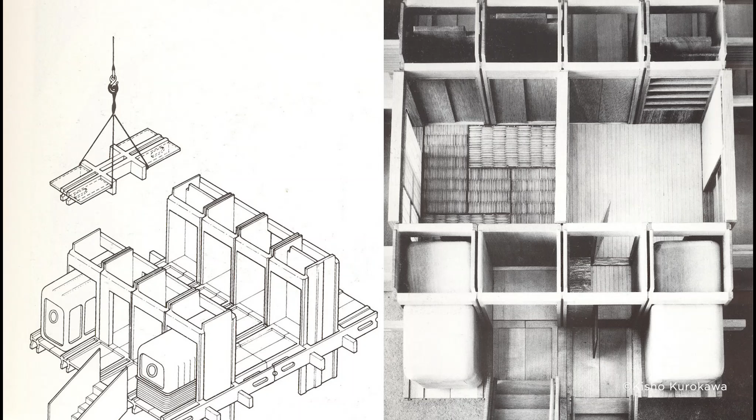That is why the master unit is placed in the center to act as a joint for the servant units that can be attached and detached from the exterior. This allows for periodic renewal of the servant units and lengthening the lifespan of the entire building. This is how Kurokawa and the Metabolists drew a direct analogy between architecture and the metabolic cycle.

However, this project was never realized, and I think part of the reason why was because it was difficult to understand. Designers need to realize that humans in general fear change and the unknown. There's something called the law of inertia that is inherent within us that stops us from taking that leap of faith.

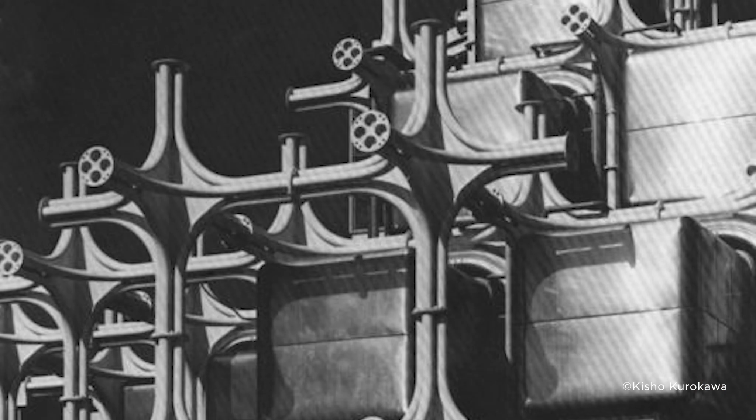In 1970, Japan held the World Exposition Fair in Osaka. It was the perfect opportunity for the Metabolists to showcase their ideologies to an international crowd. Kurokawa designed a pavilion called the Takara Beautillion. It's designed for a cosmetics company exhibiting their beauty products. The structural framework is made up of a single prefabricated framing unit, which is repeated 200 times.

Each unit is made up of 12 blunt right-angled bends of steel pipe welded to 6 arms, each consisting of 4 pipes grouped in a square. The end of each arm is welded to a flat circular disc that will be bolted together with the arm of another unit. Cubic capsules clad in stainless steel are then inserted into the framework. Here are some images of what the interiors look like and a cross-section of the interior structure.

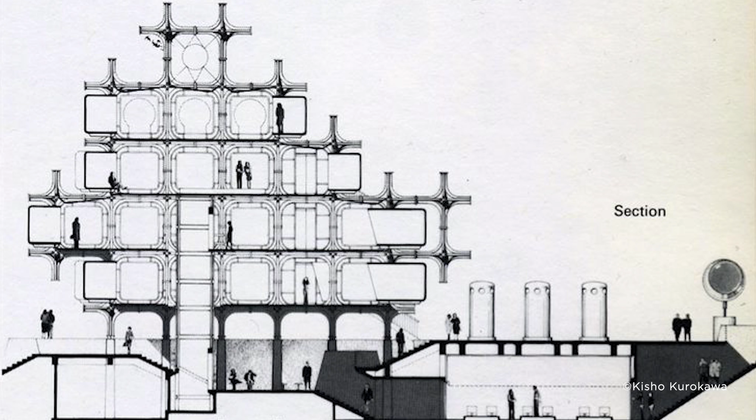On the ground level, the arms of the framing units are bolted to concrete foundation piers, and the pavilion was put together on site in only 6 days. Due to structural limitations, the prefab framing units can only be stacked up to 4 stories high. There are some extra units towards the top and some cantilevered from the sides to reinforce the Metabolist concept of expandability and growth. However, service pipes and ducts cannot be accommodated in the frame system.

So what do I think about this building? I think it looks like a living organism growing out its limbs, which I guess is a compliment to the Metabolists. You guys ever seen the movie Life with Jake Gyllenhaal? There's this alien, kind of looks like that. So yeah, visually and experientially it's very interesting, but practically I kind of need more convincing.

I understand that it's an experimental design for a temporary visitor experience, but if you want to convince people that this is the way forward, this is how we should be designing for the future, then you gotta be able to accommodate the basic services of a building, such as hot water pipes and discharge pipes.

2 years after the expo, he designed the Nakagin Capsule Tower to prove that Metabolist architecture could have a place in the urban environment. This is not a regular apartment building. It's designed for businessmen, people coming from overseas or outstationed who need a place to crash temporarily. Also for the office workers in Japan, due to the work-life culture, you can have a quick nap. Some of the occupants of the capsules are designers and artists who use them as studios.

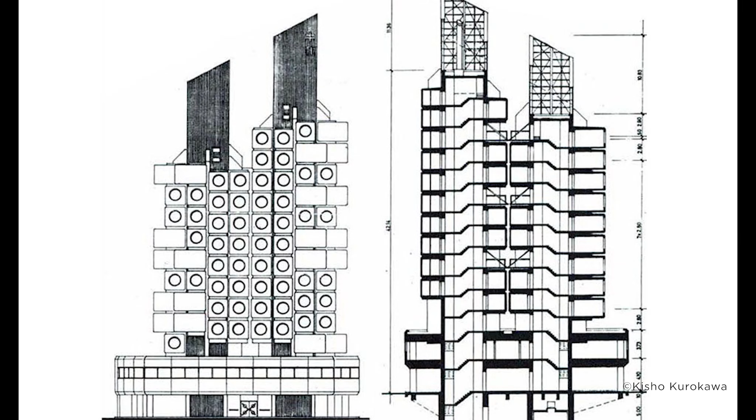In terms of structure, there are 2 major elements. There's 2 reinforced concrete shafts containing an elevator, a stairwell, and basic services. One is 11 stories and the other 13 stories high. They are left unfinished at the top, suggesting the possibility of future expansion. They measure up to 2.5 by 4 meters.

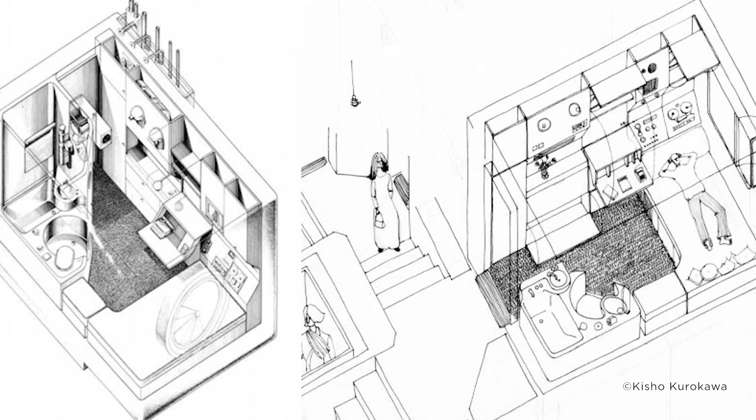Each capsule is attached to the shaft by 4 high-tension bolts and is independently cantilevered from the shaft so that any capsule may be easily removed without affecting the others. The interior of the capsules are furnished at the factory with a bathroom unit, built-in storage, furniture, and electrical appliances.

There's a pipe rack in each capsule for water, hot water, cold water, and drains, and they're connected to the plumbing units in a concrete shaft with flexible tubes. So yeah, this design definitely addresses the functional aspect that I was talking about earlier, but the durability and longevity needs to be re-examined. For one, there's a lot of water leakage and draining issues. The capsules could have been sealed better where the unit meets the concrete shaft.

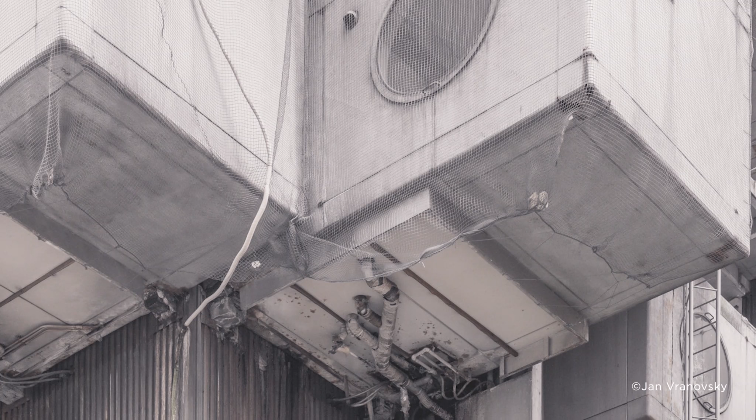A ton of rain has been seeping in through the cracks, damaging the interiors, and it isn't clear if the roof of the capsules are designed with a drainage system. A capsule without which what is contained in it is meaningless. So out of the 144 capsules, none of them had gone through a process of self-renewal like Kurokawa had hoped, because there had been no demand for it.

There's been a lot of back and forth with the developer wanting to demolish it and the architecture community wanting to preserve it because it's, you know, the most well-known building that came out of the Metabolist movement. From what I've heard, what I've read, it's going to be demolished very, very soon.

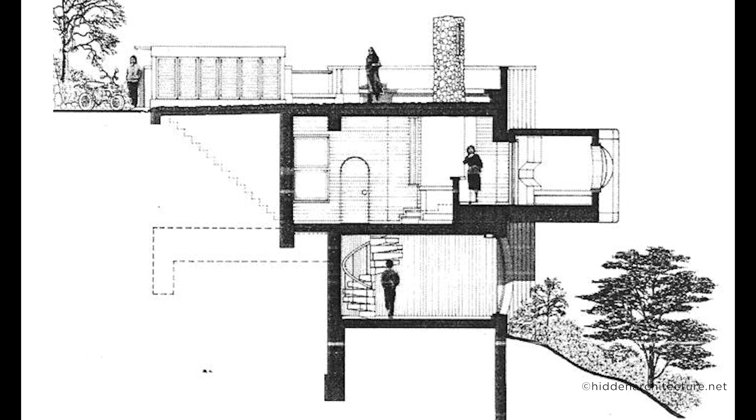The capsules were not only used for the Nakagin Tower, Kurokawa also placed them in a design for a private residence called the Capsule House K. Here, the capsules are clad in corten steel and given specialized functions such as a kitchen, bedrooms, and a tea room, which are interconnected by a central reinforced concrete living space. With the site sitting on such a steep slope, the roof was used for parking and the entrance is beside it. The capsules are attached by the same high tension bolts as used for the Nakagin Tower and are cantilevered in the same way.

The tea room follows a plan made by Kobori Enshu, one of Japan's greatest tea masters who lived in the 16th century. The 2.5 by 4 meter dimensions of the capsule are exactly the same as those of the traditional Japanese tea house, dictated by the size of tatami mats. Now this design for me exudes peak creativity, right? Usually on a site like this, houses would be like ginormous mansions, but it's probably due to the size of the plot as well, but I do appreciate the small scale of this building.

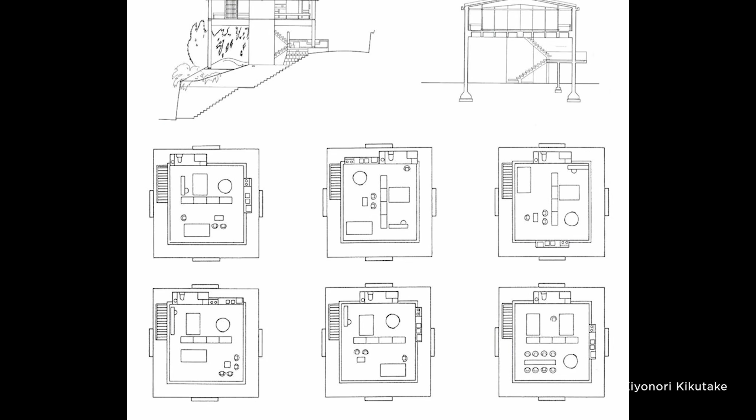And yeah, now let's talk about Kiyonori Kikutake. He's known for the design of his own residence called the Sky House, which was built in 1958 in Tokyo. The main structure comprises a 10 by 10 meter concrete slab elevated by 4 concrete pillars situated on every side's central axis, which also supports the roof. The plan is kept open without any fixed elements for flexibility. Kitchen and bathroom units are placed on the periphery.

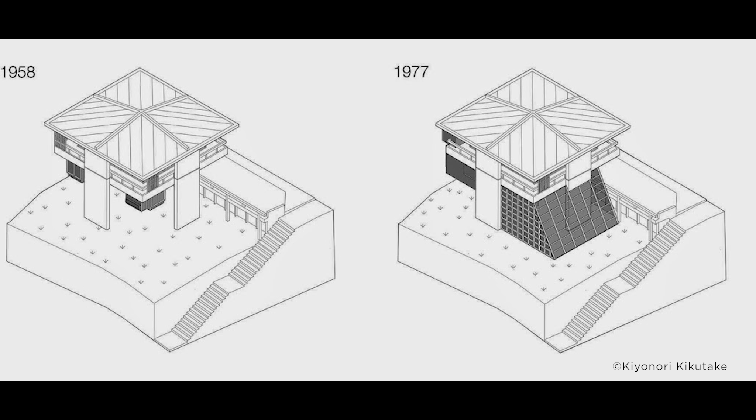Floor-to-ceiling glazed sliding doors provide continuous visual linkage to the exterior. It also enlarges the space by blurring the boundary between the interior and the balcony. The waffle grid floor plate serves as a joint element to accommodate future expansion. A bedroom and study unit was plugged into the grid later on for Kikutake's son and was removed when he moved out. Unlike Kurokawa's projects, the Sky House residence went through multiple extensions to accommodate the changing structure of the family and the need for new spaces.

In my opinion, this has got to be the most successful project incorporating Metabolist principles that is successfully integrated into the surrounding context. It's the only building that's gone through a successful renewal and extension and also removal of certain parts, and yeah, it's still being used to this day by the architect and his family.

Now let's talk about Kenzo Tange. You've probably heard of him before. He's like Japan's national architect. His projects include the Hiroshima Peace Memorial Park, the Kuwait Embassy, what else? The Tokyo Olympic Center, but we're not going to talk about those today.

We are going to talk about his endeavors, his adventures into Metabolist architecture. Even though he's not part of the Metabolist group, he was influenced by their philosophies. The Shizuoka Broadcasting Center, built in 1967, was his first attempt at introducing Metabolist ideals into the urban fabric of Tokyo.

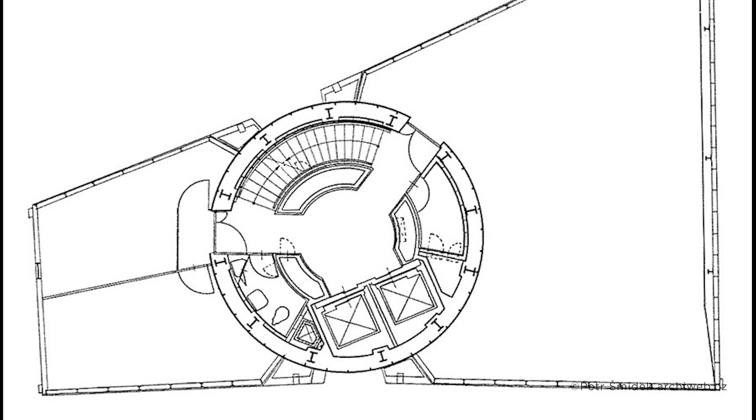The site was 189 meters squared, right beside a train station and an overhead train line, so the most efficient method was to build vertically. Similar to the Nakagin Capsule Tower, it has a reinforced concrete shaft placed at the center of the site. It's 7.7 meters in diameter and contains stairs, elevators, toilets, and a kitchen. A total of 13 individual offices were arranged in 5 groups of 2 or 3 and attached to the shaft.

The capsules are 3.5 meters high. Some areas were left open in between them to allow for future expansion, which has yet to be realized. For the time being, they are being used as balconies by the office workers. I think it's a brilliant design, you know. Technological advancements have allowed us to create more space in the sky, and with such a small site, I think it's a job well done.

Even though expansion has not occurred yet, keep in mind that these structures were designed to outlast the conventional building, which has an average lifespan of 60 to 100 years. So yeah, you can't say it's unsuccessful yet, because it could go several lifetimes before anything happens.

The Yamanashi Press and Broadcasting Center was another project Tange worked on in the 1960s that incorporated Metabolist ideals. Located in Kofu, Japan, the city has around 100,000 residents, much smaller than Tokyo, and it lies in a mountainous region near Mount Fuji. It was designed for 3 media companies, a newspaper printing plant, a radio station, and a television studio. Although it looks visually complex, the building shares the same structural concept as the Shizuoka Broadcasting Center.

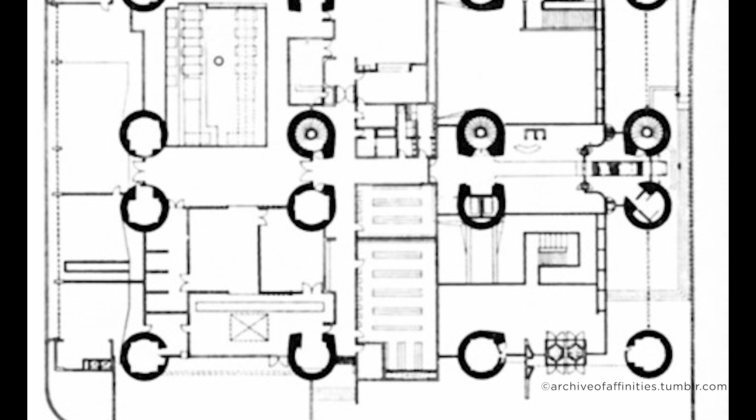Elevators, stairs, piping, equipment rooms, and sanitary rooms were grouped into 16 reinforced concrete cylindrical towers with a 5-meter diameter that serve as the structural framework of the whole building. Indication of possible future expansion is suggested by the voids in between the offices, the height variations of the concrete towers, and exposed beam joints on the periphery of the building.

The vision that Tange had was that the generative system could grow and take over the whole town. Currently, the building stands alone like an alien spaceship within Kofu's nearly medieval urban texture, dominated by low-rise, tiled roof houses. So, is Metabolist architecture viable? In my opinion, it depends.

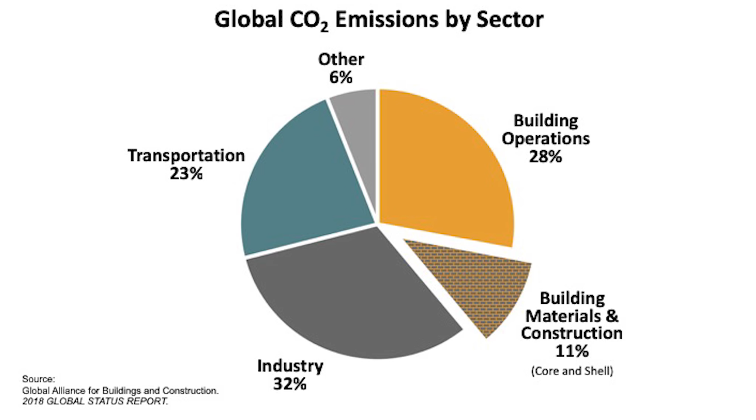I think that separating building components and grouping them based on their lifespan can prove to be an efficient solution for resource conservation. Currently, carbon emissions from the built environment sit around 39% of the global output. So if we're able to find a way to keep the entire structure of the building intact while only replacing those components that are in need of renewal, then we could reduce the carbon emissions of our sector.

However, as we've come to realize from Kurokawa's projects, it's easier said than done. Only 30 years have passed since its construction and it started having water leaking issues. Naturally, the more places where water can collect in a building's envelope, chances are drainage issues will come up more often than usual. So if we want this to work, we gotta find a way to waterproof the joints where the capsules and the main structure meet.

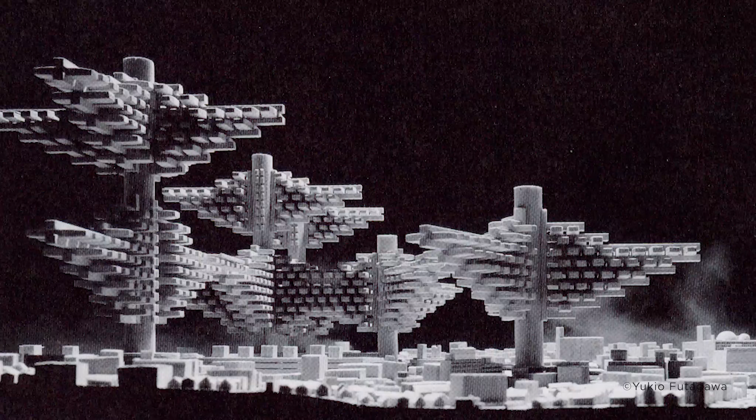Among all the Metabolist projects that were put forward, the projects that I talked about earlier were towards a smaller scale. They are also one of the few that were actually built. There are countless more projects of a greater scale that remain at schematic phase and never followed through. I couldn't find any hard evidence on why these projects were never built, but I've come to realize that architecture is not just influenced by the architect. It's also influenced by economic, ethnographic, political circumstances, and many others.

Ultimately, the relevance of the architecture style is predicated on its demand, right? So if it's efficient, if it's useful, it's functional, then people gradually adopt it. The best way to showcase its benefits is through small projects such as the Skyhouse Residence. Bigger projects of this sort usually stay in the schematic phase due to public reluctance.

Of the 140 capsules of the Nakagin Tower, none of them had been replaced before. And for the broadcasting centers that Tange designed, none of them had gone through a process of extension or expansion. This goes to show that architecture cannot be forced on an individual. Architects at the end of the day are there to serve the people and not the other way around. Alright boys, I'm gonna wrap this up. It's getting dark. That's my 2 cents on Metabolist Architecture.